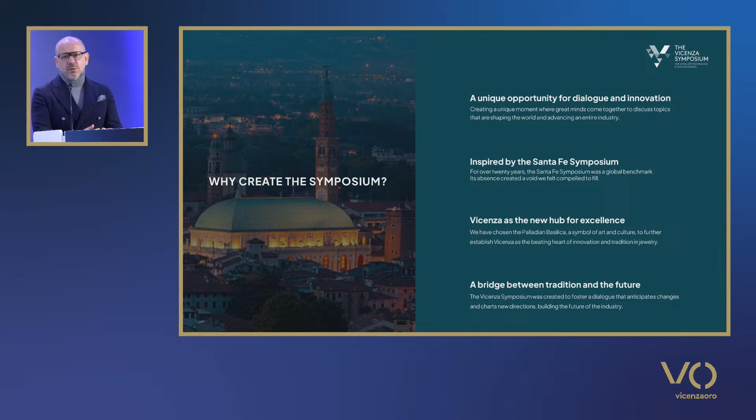Well, of course, we thought, where are we going to hold it? And then one day we thought, well, why not Vicenza? And here we have developed the most appealing part of the whole conference.

The conference will take place from the 2nd to the 4th of September, 3 full days, and it will take place every second year. We will give the opportunity and the time to those who want to share their efforts to present them, and we will give innovation time to take place.

We expect at least 100 paying participants. And I would like to add that we're trying to do anything to have the Basilica filled with participants, because we would rather have too many participants than too few.

We will have 21 speakers with a very high quality level and significant contributions. 7 presentations each day, 45 minutes for each single speech. And now the most beautiful aspect.

Personally, whenever I've attended a symposium, well, they used to take place in hotel ballrooms. Okay, the symposium also works in a ballroom, but think about being in the immense Basilica by Palladio. This is a fair playground for our ambition.

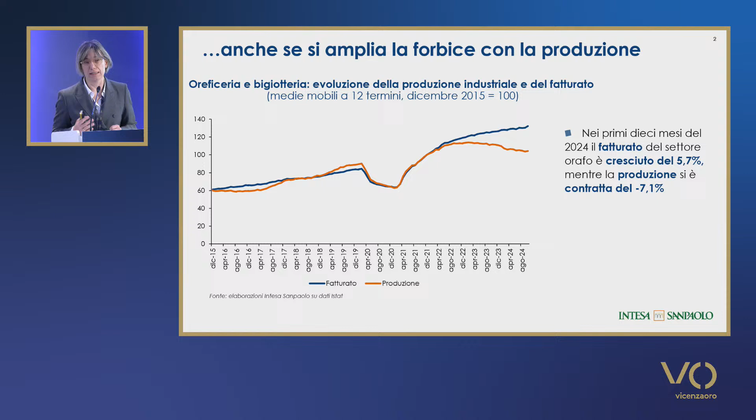Manufacturing quantities, and this again proves the previous data to be true also for gold jewelry. There has been a growth by 5.7 in terms of turnover, but the production has been reduced by over 7%, as confirmed also for the month of November. So what has led to this growth in terms of turnover? Well, competitiveness

certainly on international markets. Indeed, this industry is always able to present and offer its products on foreign markets, with a value growth by 44%. Comparing the gold industry with other elements of the fashion industry proves that this industry can always be different, but we're going to see in greater detail why this growth has been so remarkable.

The industry, in fact, has confirmed its leadership in Europe. Italy is certainly the most important market for the production of jewels, and this is quite self-evident looking at this chart, with the leadership in terms of export, 9.8 billion of jewels exported.

This figure could be even an underestimate, because it would be better to look at the export in Ireland. We know that in Ireland no jewels are manufactured, but we could include Ireland, and even the export by France, certainly are impacted by the connection with the luxury high-end companies that import products from Italy. Over 54% of the export from Europe are coming from Italy.

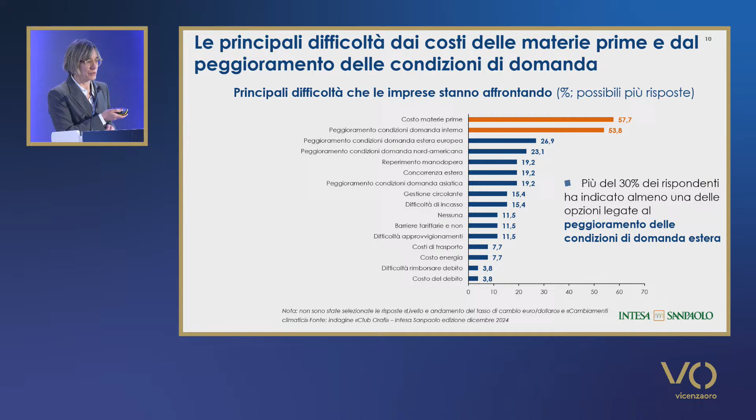What are the difficulties that companies should overcome? Certainly the cost of commodities and raw materials is number one, as well as the fear that domestic demand slows down, along with international demand. 30% of respondents identify this as the main difficulty to tackle at this specific point in time.

Companies are very much impacted also by the results of the US elections. We looked at this data in December, and Trump had just won the elections when we carried out this interview. So we interviewed the business community to see what their expectation was in case of an increase of tariffs. Companies proved to be quite dynamic in finding new customers in different markets should tariffs be imposed in the US.

Pure gold, platinum and silver, like all pure metals, are relatively soft, with low yield points and hardnesses, and this has several drawbacks in the fabrication of 24 karat gold, pure platinum and pure silver jewellery, limiting design possibilities as well as making such jewellery heavier and prone to scratching and wear. This problem has traditionally been overcome by alloying to increase hardness and strength, leading to the use of carat golds, sterling silver, and 950 platinum, and the lower finenesses of platinum and silver in modern jewellery.

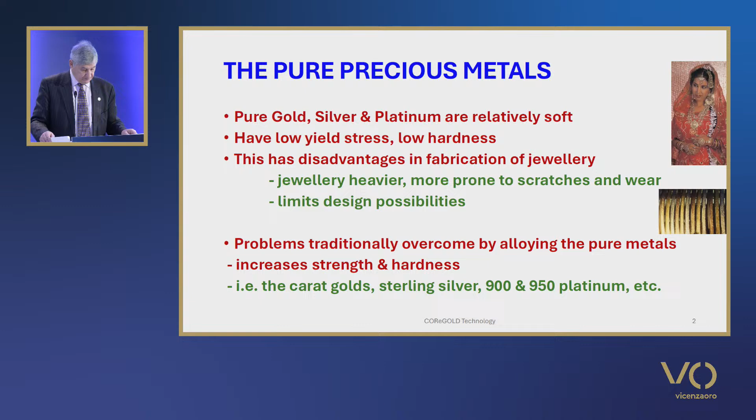However, for gold, especially 24 karat gold of purity greater than 99.0%, is the alloy of choice in the Far East, where it is known as Chuk Kam, meaning pure gold. In the largest market, India and its subcontinent, 22 karat gold jewellery dominates. These two markets account for around 40% of total jewellery fabrication, and the relative softness of both 22 and 24 karat gold is seen as a weakness.

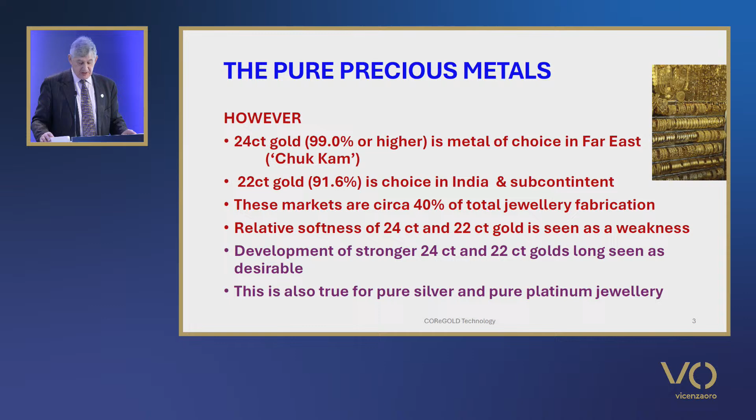The development of stronger 22 and 24 karat golds has long been desired. For gold, the development of 990 gold - that's 99% gold, 1% titanium alloy - in the late 1980s, hallmarkable as 24 karat, overcame many of the deficiencies of 24 karat gold with good strength and hardness. But it has not met with much commercial success for several reasons.

In recent years, however, there have been a number of hardened or improved strength 24 karat gold materials developed with finenesses of 99.5% or higher, some in commercial production, where improved hardness and strength have been achieved by micro-alloying, i.e. the addition of very small amounts, typically 0.3%, of certain metals, and these are attaining some limited penetration of the market.

Microalloyed silver and platinum materials with increased strength and hardness have also been developed and are being commercialised. Until relatively recently, little information was published on such microalloyed precious metals, mainly in patents, and there was little understanding of the metallurgical basis for such materials.

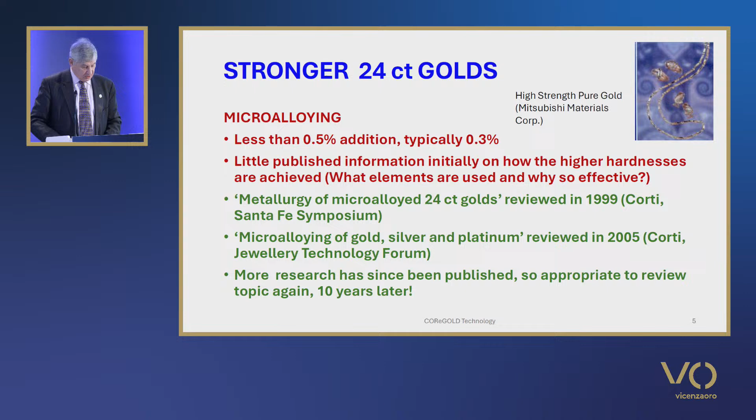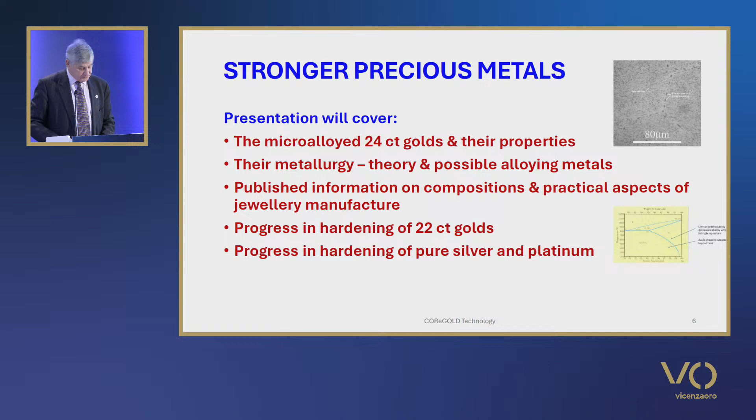Thus, some 10 years later, it is perhaps an appropriate time to update progress and knowledge. This presentation initially focuses on the mechanisms of strengthening metals, then reviews recent developments by conventional alloying of pure precious metals, and then on microalloying of gold, covering the following aspects: the microalloyed golds that have been developed in terms of their properties compared to conventional carat golds; the metallurgy, the theoretical basis for hardening, and possible candidate alloying elements which could form the basis of microalloyed 24 karat golds; and published information on the compositions and practical aspects of jewellery manufacture in actual microalloyed 24 karat golds. Progress in hardening of 22 karat and other high karat golds, as well as platinum and silver, is also discussed. The advantages and disadvantages of such materials for jewellery application are considered.

We look at the mechanisms of strengthening pure metals by alloying, as well as work hardening by deformation. There are essentially three basic mechanisms of strengthening or hardening pure metals through additions of alloying elements: solid solution hardening, dispersion hardening by second phases, and grain refinement.

Solid solution hardening. In hardening by solid solution, alloying additions dissolve in the pure metal, that is, they are incorporated into the crystal lattice of the pure metal, and this results in distortion of the crystal lattice, making dislocation slip more difficult. That means it requires more force to deform the metal.

The degree of hardening depends on the relative difference in atom size of the pure metal and the alloying metal, as well as the amount that you add. Thus, in carat golds, it is well known that copper is more effective than silver in hardening gold, as its atom is about 13% smaller compared to silver,

which is only slightly larger than the gold atom. In dispersion hardening by second phases, when a second phase is dispersed in the metal, it will cause some hardening.

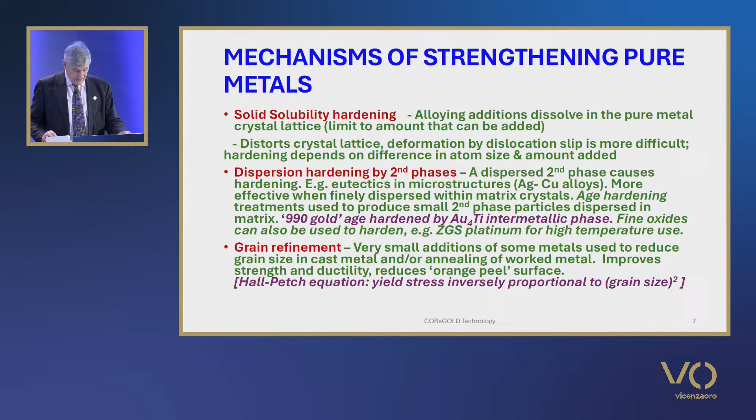If we look at conventional alloying, here we're talking of adding alloying metals in amounts of at least 0.5% or more. The addition of 1% titanium to pure gold to produce 990 gold has been referred to previously. Other significant improvements to 24 and 22 karat golds have been described using conventional alloying approaches.

Dutoit and co-workers at Mintek in South Africa showed that a 995 fine 24 karat gold containing 0.3% antimony and 0.2% cobalt can be age hardened to a hardness of 131-142 Vickers, depending on aging temperature, as shown in the table. And we can argue whether this is conventional or micro-alloying. My feeling is it's probably the latter.

Fischer-Bühner, when he was at FEM, has demonstrated the use of circa 2% to 2.5% cobalt additions to effect significant strengthening of 22 karat gold with aged hardnesses of 200 to 260 Vickers, although this involved a relatively high solution annealing temperature of 900 degrees Celsius.

And he also showed that a combination of cobalt and antimony, in total 1%, resulted in a hardness of circa 150 Vickers after aging, but using a lower solution temperature of 700 degrees.

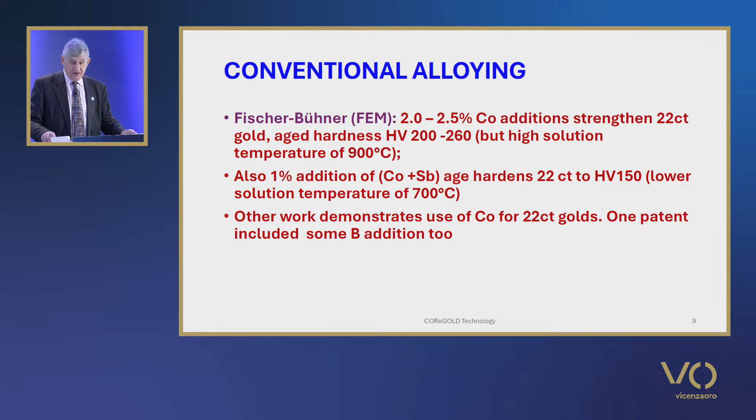We now move to microalloying of gold. I'm going to repeat a lot of what I've said in my earlier review in 2005. But before I start, I just want to say something about the density effect when you're alloying.

We must distinguish between the difference between the atom weight and the atom volume in an alloy. The higher atomic numbered metals are heavier and denser. Gold is a heavy metal with a density of 19.32, where silver has a density of only 10.5 and copper a density of only 8.93.

Thus, in describing alloy compositions, we must differentiate compositions given in terms of weight percent and atomic percent. Weight percent: the relative weights of alloying metals present. Atomic percent: how many atoms there are of each metal in the alloy. This difference is illustrated with gold-copper alloys.

An alloy of 50 atomic percent gold atoms and 50 atomic percent copper atoms, that is 1 gold atom to 1 copper atom, has a weight composition of about 75% gold, 25% copper. And that reflects the difference in the weight of the gold and copper atoms.

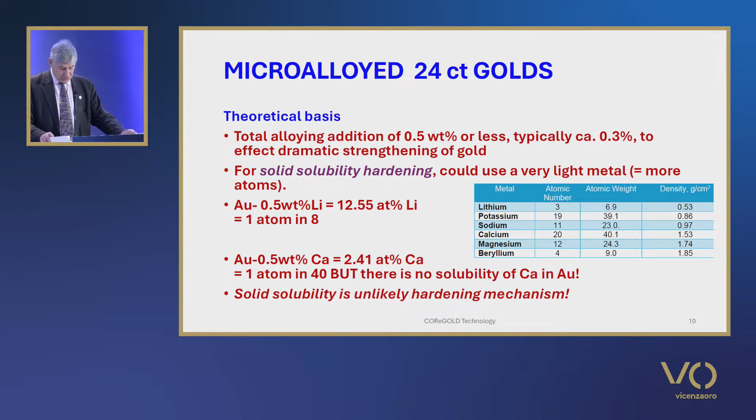Reference to the phase diagram shows that there's virtually no solid solution of calcium in gold, and that there is a eutectic comprising two phases: gold and an intermetallic compound, gold-5-calcium, which has a high gold content. If this phase is finely dispersed in the microstructure, then we have the basis of a possible alloy system that could provide improved properties through dispersion hardening.

We find similar features to the gold-calcium system in the phase diagrams for the gold-potassium system, but less strongly, and in the gold-beryllium, gold-magnesium and gold-sodium phase diagrams, suggesting that they are less favourable for a microalloying approach.

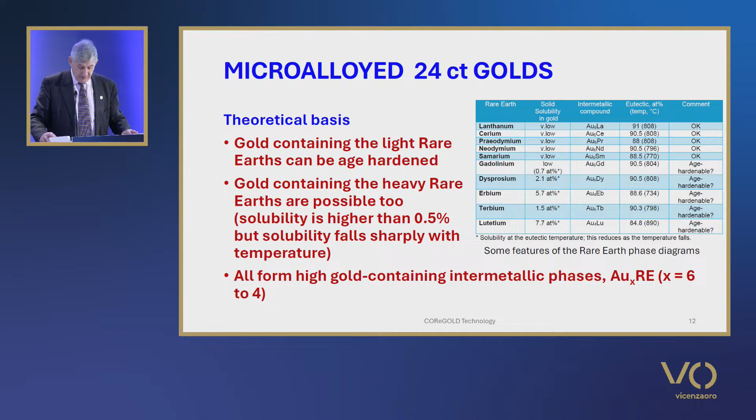In the development of 990 gold, Gafner describes work done by the Degussa company in Germany on other candidate alloy systems, which included the heavy rare earths. The basis for selection was the possibility of second phase precipitation, as the alloy containing a 1% alloying addition in solution was cooled from 800 to 400 degrees Celsius.

From this, a table of probable hardening effectiveness was constructed, and I haven't put it on the slide, but it is in the written paper, which you can get when it's loaded up on the website. The fraction of hardening phase was taken as an indication of the hardening effectiveness. The reason for developing the 990 gold titanium alloy is obvious from this table, as it has the highest fraction. The promise of the rare earths and zirconium was also noted.

However, in that work, a 1% alloying addition was being evaluated. If we consider only a 0.5 weight percent addition of rare earth, then from the solubility data at 400 degrees Celsius, we cannot expect much hardening phase to precipitate on annealing solutionized material at 400. Fortunately for us, Giusti carried out some tests on gold rare earth alloys at alloying levels of 1 weight percent and lower. Cast alloys were annealed at 800 for 1 hour.

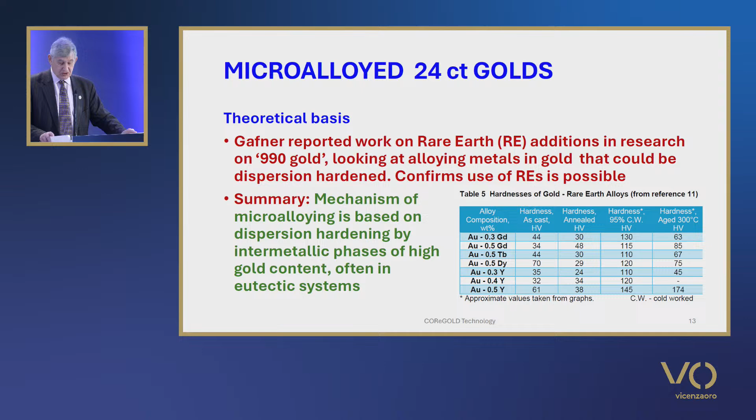So let's move on and just recap on improved strength 24-karat golds. As I reported in 2005, a number of improved strength 24-karat golds have been developed, some commercially available, and jewellery produced in these materials are in the marketplace, particularly in Japan. All have virtually the same melting point, colour and density as normal pure gold. These are listed on the table on the slide.

It is evident from this table that while annealed hardness is usefully higher than for normal commercial pure gold, cold working results in significant hardness increases, and that some materials can be further hardened by low temperature aging heat treatments. Perhaps not surprisingly, the highest hardnesses are achieved in the lower purity golds of about 99.5 to 99.7 fineness. Most can be cast, but the best hardness values are achieved in the wrought condition, often coupled with aging heat treatments.

From a practical standpoint, as far as published information tells us, these materials cannot simply be remelted and recycled without loss of strength, as the hardening microalloying additions lose their effect on remelting. As we shall see later, this is due to the oxidation of the microalloying metals on melting.

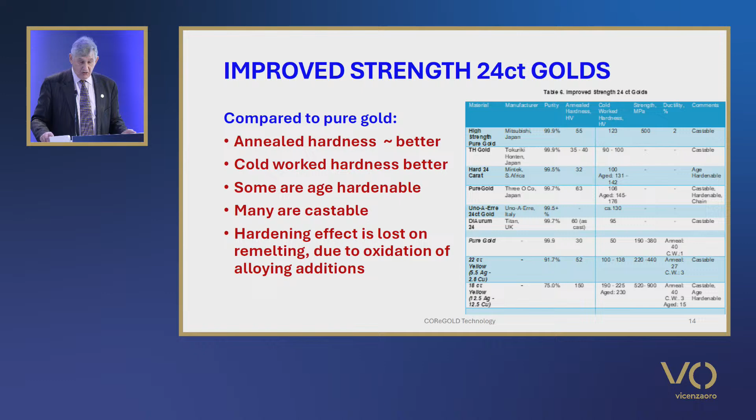The superior strength of these materials has a beneficial effect in manufacturing jewellery in that certain processes can be done that are difficult with normal 24-karat gold. For example, findings such as lobster claws and some difficult chain designs become feasible. It also allows lighter weight 24-karat gold jewellery to be made with obvious economic benefit.

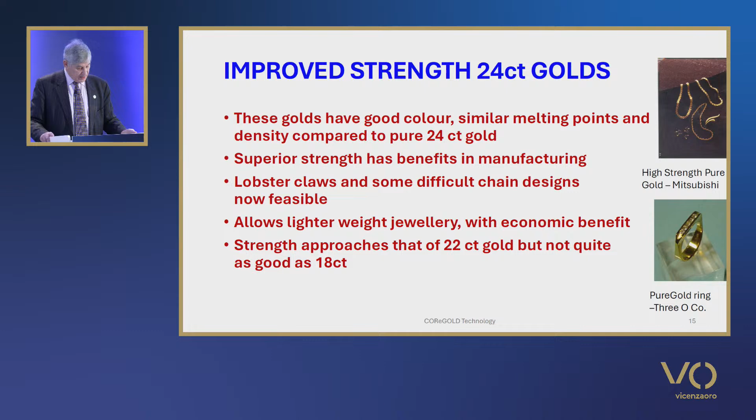When compared to standard yellow carat golds, it can be seen that the improved strength microalloyed 24-karat golds approach the hardness of 22-karat gold in both annealed and cold work conditions, but are still some way behind those of 18-karat gold.

So what are the compositions of these microalloyed golds? The patent literature indicates that the Mitsubishi Materials high-strength pure gold material comprises gold of at least 99.9% purity and 200 to 2,000 parts per million calcium and or beryllium, germanium or boron, whilst a further patent from Mitsubishi indicates just 500 to 2,000 parts per million calcium plus 1 to 50 parts per million of carbon. Calcium appears to be the main hardening addition.

The Three O company patent indicates that the pure gold material contains 99.7% gold plus 50 or more parts per million of gadolinium and optionally 100 to 3,000 parts per million of calcium, aluminium or silicon. In a patent from Tanaka KK in Japan, an alloy for precision casting is claimed containing small amounts of hafnium and the rare earths.

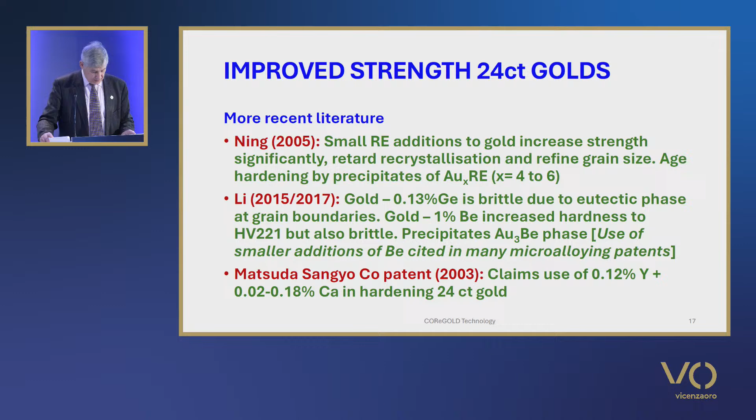The 2003 patent by Matsuda Sangyo claims the use of 0.12% yttrium and 0.02 to 0.18% calcium for hardening of 24-karat gold. Another patent by the University of Tokyo claims a gold-X rare earth alloy, where X is selected from aluminium, gallium, indium, germanium, silicon and tin, and the rare earth is a rare earth element.

An earlier 2004 patent by Tokuriki Honten claims a harder 24-karat gold containing at least 99.5% gold and 5 to 1,000 parts per million of phosphorus, plus 10 to 1,000 parts per million of one of a group including antimony, copper, zinc, iron, cobalt, nickel, gold, silver and gallium.

A Chinese patent claims a stronger 99.9% gold microalloy containing calcium and a rare earth element plus a grain refiner, while a 2000 patent by Ogasa claims an age-hardenable 24-karat, 99.98% gold microalloy containing gadolinium that reaches a hardness of about 150 Vickers after aging.

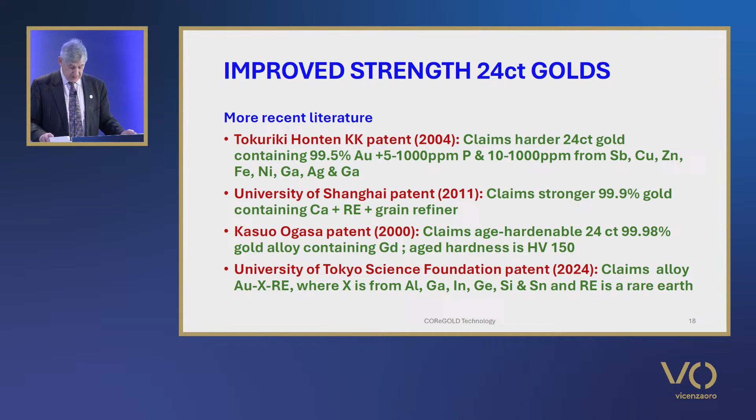So I think in summary from all of that, we can say that the more recent literature confirms the use of calcium and rare earth additions as preferred microalloying metals, but other additions are also possible. It confirms age hardening as the major hardening mechanism, with the precipitation of high gold content intermetallic phases within the grains.

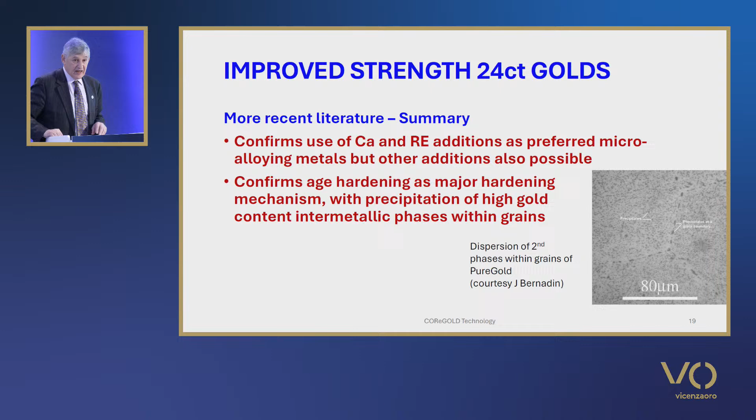And in the picture, it's a microstructure of the Three O company's PureGold, and we can see there are some precipitates on grain boundaries, but the whole of the internal grains has got a very fine distribution of the intermetallic hardening phase.

I'm now going to move on and talk about improved strength 22-karat gold alloys. As noted in my presentation last year here at JTF on the benefit of titanium alloying additions to precious metals, 22-karat golds also tend to be soft due to the limited amount of alloying element that can be added, which is typically silver and copper.

Fischer-Bühner developed 22-karat gold alloys containing cobalt or a mixture of cobalt and antimony, as I mentioned earlier, to harden 22-karat golds by conventional alloying. And these have increased hardness by age-hardening treatments, as discussed earlier.

Similar work has been reported by Mintek in South Africa. In their 2000 paper, they reported on a new hard 22-karat gold alloy, but gave no details of its composition. It has a colour similar to conventional 22-karat gold, but can attain a peak hardness of 274 Vickers in the cold rolled and aged condition.

However, in a later paper in 2003, they describe work on both 99.5% gold and 22-karat gold, that's a gold, copper, silver alloy, in which they study the effects of alloying metals cobalt, germanium, antimony, zirconium and vanadium in hardening them. There they report a maximum hardness of 274 Vickers after cold rolling and aging for a

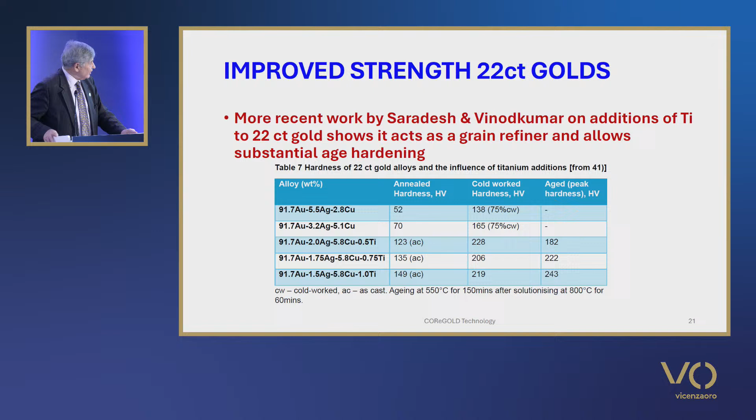And here we can see some results that I'm just going to discuss in the next slide. And I showed this last year, so I'm going to move on quickly and just talk about them. So 22-karat gold alloys, I spoke about last year, demonstrated that titanium alloy additions act as a grain refiner and allow substantial age hardening. And we saw in that table some results.

The commercial use of a 22-karat gold alloy strengthened by titanium, based on this work by the Titan company in India, has allowed jewellery products to be marketed that show a 30% weight reduction compared to conventional 22-karat gold alloys.

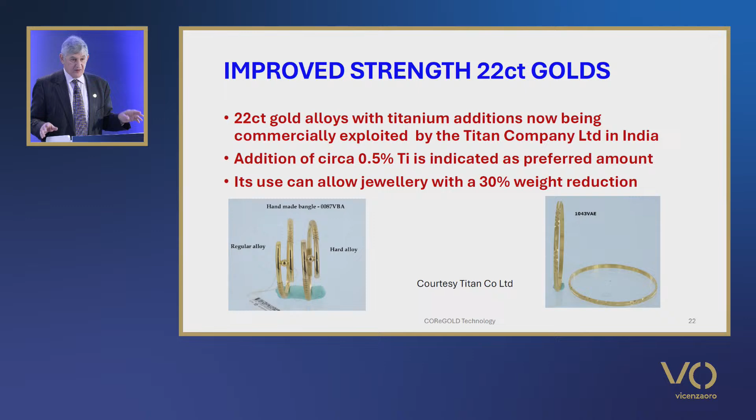The figure on the bottom left of the slide shows a hollow bangle in their new alloy. That on the right shows a solid bangle. And my understanding is it's about 0.5 weight percent titanium is the alloying addition.

And let's just talk about some of the practical aspects of making jewellery in these microalloyed golds. In summary, these are that you can investment cast and fabricate by conventional technologies. You can make some products that are difficult with normal 24-karat gold, as I said earlier, some chain designs, springs, screws, catches, and other findings.

You can make lightweight, strong chains with good wear properties. Melting generally needs to be done in an inert atmosphere to prevent oxidation of the microalloying metals. Therefore, they cannot be made easily in a small workshop situation by conventional melting in air.

As with normal 24-karat gold, soldering must be consistent with local national laws, and in some countries, use of a lower 22-karat solders is allowed, although there may be limits on the amount of solder used.

However, another factor is the temperature of soldering, which can lead to a loss of work and age hardening in the vicinity of the soldered joint. Laser welding may offer a better solution there.

There are also very low melting point 22-karat gold solders, I might like to remind you, and one solder has a melting point of only 361 degrees Celsius. Polishing should be easier than conventional 24-karat golds, as they are harder. And Bernardin, in his paper at the Santa Fe Symposium, noted that castings require procedures similar to those for platinum.

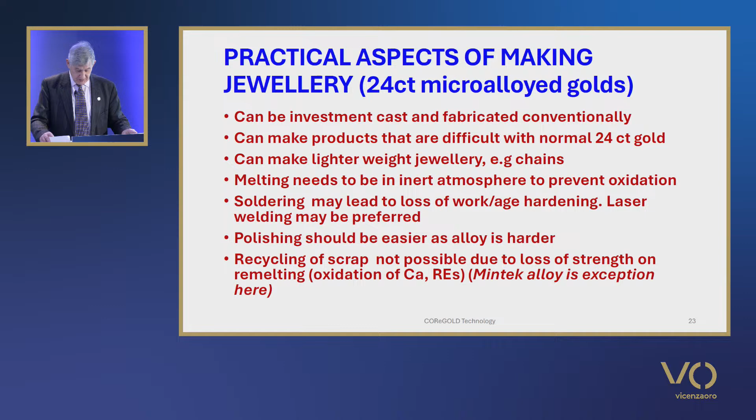Right, let's just move on quickly to the microalloying of silver. In principle, it will be evident that the same approach for microalloyed gold could be applied to silver. The developer of pure gold also developed a material pure silver, which is a 99.3% silver microalloyed material, and this is being marketed in the USA.

It is claimed to be easy to work, as it does not require annealing, is very tarnish resistant, casts well and is harder than sterling silver. The patent covers microalloyed gold, silver, palladium and platinum materials.

In the case of silver, an alloy of at least 80% silver is claimed, containing the rare earth gadolinium in the range of 50 to 15,000 parts per million, with optional further additions of alkaline earth metals, silicon, aluminium and boron in the range of 50 to 15,000 parts per million in total, with hardness values of 130 Vickers or higher and a Young's modulus of not less than 7,000 kilograms per square millimetre.

A further embodiment of the patent claims an alloy of at least 99.45% silver with 50 to 5,000 parts per million of gadolinium, plus further optional additions of the same metals. Hardness values of at least 120 Vickers and a Young's modulus of 7,000 kilograms per millimetre squared are claimed, with hardness rising to at least 140 with 50% cold work.

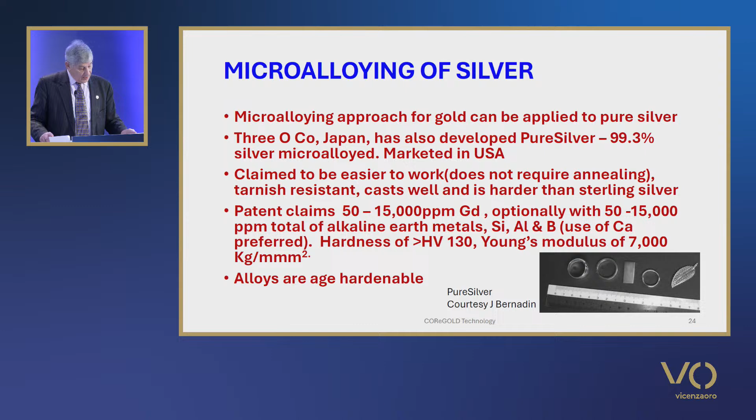And lastly, let's talk about microalloying of platinum. Microalloying of platinum should be possible. Of course, oxide dispersion strengthened platinum, as I mentioned earlier, for industrial applications has been on the market for many years.

In a patent from Japan, a hard, high-purity platinum alloy containing 10 to 100 parts per million of cerium is claimed that has a good hardness, luster and tarnish resistance, suitable for jewellery manufacture, and is at least 99% purity. Vacuum or inert gas is required during melting to prevent loss of cerium by oxidation.

A platinum cerium phase diagram shows characteristics similar to that of the gold cerium system. For cerium contents of 0.03 to 0.3%, hardness values of 60 to 102 were obtained compared to 40 Vickers for pure platinum, and hardnesses of 120 to 136 for 950 fineness platinum alloys.

A commercial alloy UHP platinum from Japan appears to be a microalloyed platinum at 999.5 fineness, but little information is available.

The Ogasa patent, that I mentioned earlier, also includes platinum materials, and this claims platinum alloys of at least 85% platinum containing gadolinium and the other optional elements listed above for silver, preferably calcium, in the range 50 to 15,000 parts per million in total.

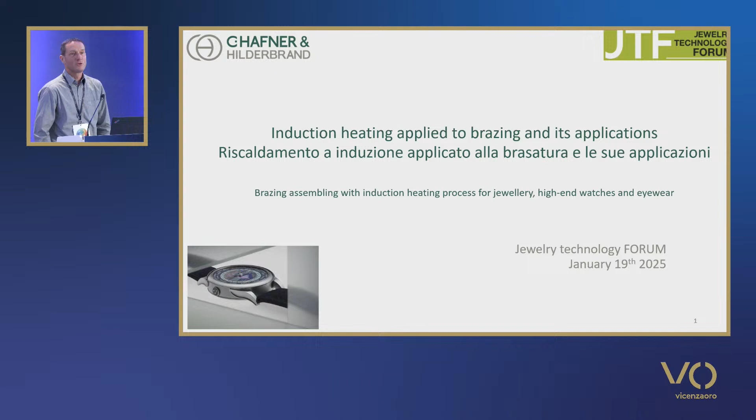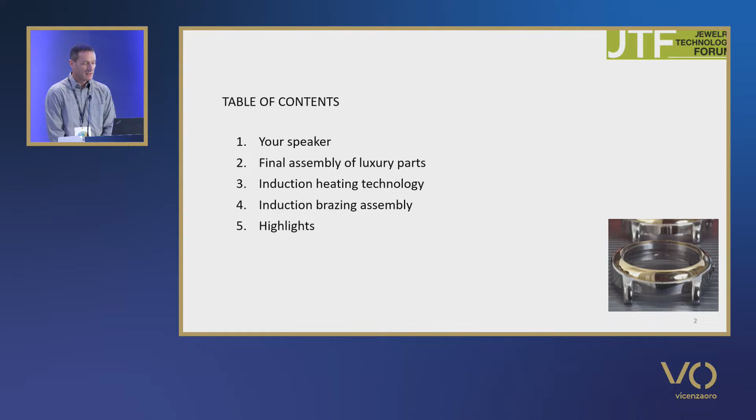My presentation is divided into 5 parts. First I introduce myself. After, I show you the requirement of final assembly for luxury parts. And after, I present you the induction effect, and finally merge the assembly for luxury parts and induction effect. At the end, you have to remember the highlights.

So myself, first, I just apologize for my lovely French accent. Shortly, I have about 30 years of experience in welding and brazing, including 20 years in the luxury sector.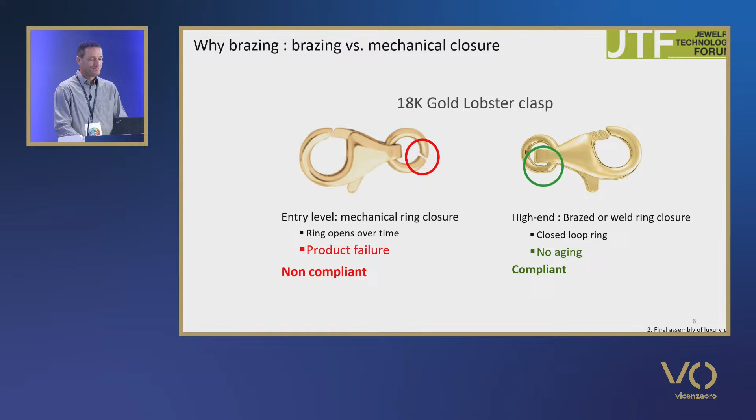Another way, two ways to create a completely metallic link, is brazing and welding. For welding, only the laser is compliant with luxury requirements due to small pieces and very high precision.

For laser welding, the laser ray melts locally the 2 different parts and creates a definitive link. For brazing, the key point is to insert a low melting alloy, not too low, and during heating the low melting alloy creates a definitive link for assembling the 2 components.

I just insist on a wording point. What we have to say is, what is it, solder paste or brazing paste? According to the standard, the term soldering, also called soft brazing, must be used for assembling with filler metal at a temperature under 450 degrees.

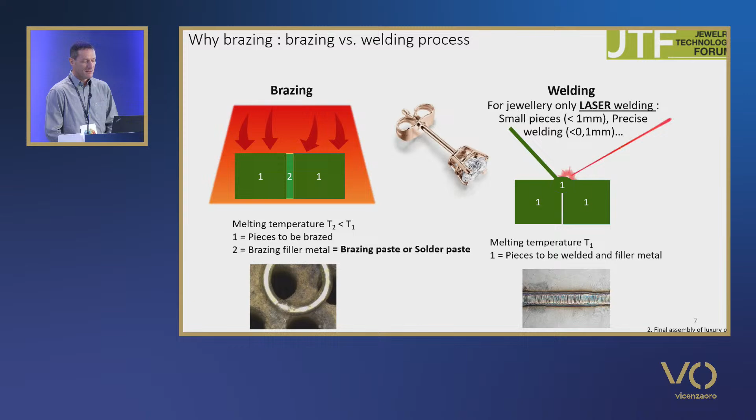For instance, when using tin-based filler metal for assembling electronic components, it is called soldering, and so the filler metal is called solder paste. The term brazing, also called hard brazing, must be used when the assembly is carried out at a temperature above 450 degrees. It is always the case for luxury goods. Subsequently, only the term brazing paste will be used.

Welding is very interesting for very high mechanical strengths, and it is possible to use a filler metal exactly with the same composition as the base metal.

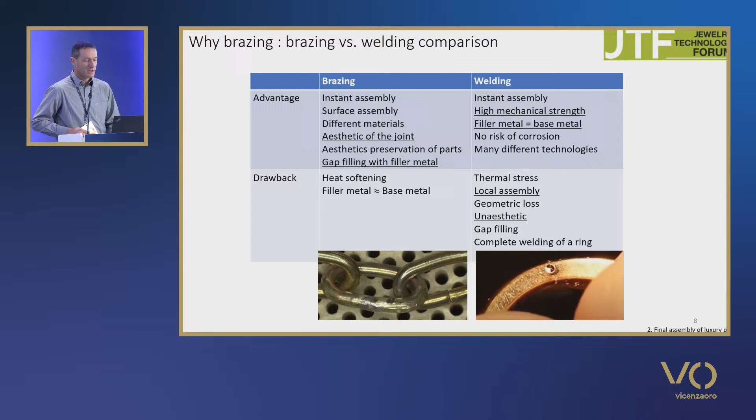For brazing, the key point is the aesthetic of the joint. Welding involves very local heating, and so an affected zone. Welding is very interesting for repairing. Brazing, with very high quality and the possibility to braze the finished part, is perfect for first production.

Brazing overall process: there are some subsequent operations—machining, deburring, washing—and you have to pre-assemble the components and dose the filler metal. The heating process of brazing can be performed by a furnace, torch, or induction. And the next steps are finishing, grinding, something like that.

The brazing filler metal requirements. The key points for filler metal is melting point, which should be as high as possible, but not too close to the component's melting point.

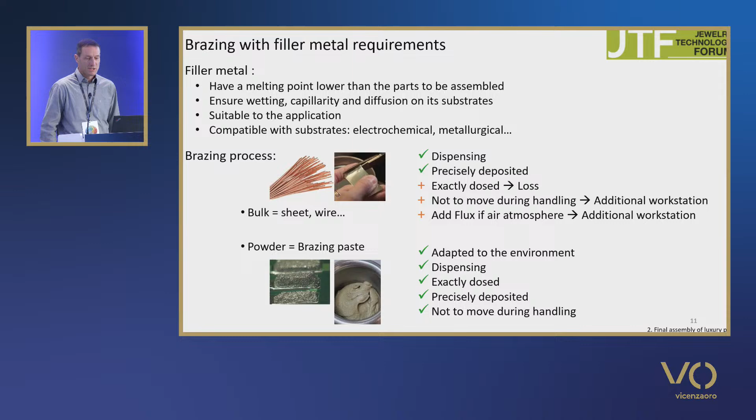Suitable to the application means the right metal, first the right metal fineness for 18 karat gold, the right color or the closest color possible, and the mechanical requirement for luxury goods.

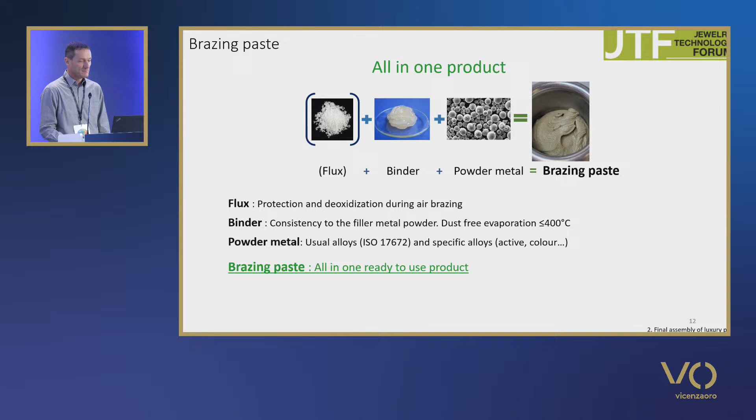What is brazing paste? A brazing paste is a mix of a flux, a binder, and a powder metal. The flux has a first shielding effect on the components, and when it completely melts, it creates a deoxidation in order to protect the filler metal. The binder allows the powder to be packaged and dispensed. So brazing paste is an all-in-one, ready-to-use product.

Some key points about the brazing paste. First, I insist on the color. On the right, you can see the CIELAB diagram that presents the three base colors in a board. As you can see, 4N and 5N, pink and red golds, are on the right, and traditional alloy, used in bulk way, is quite far from the real color.

A key point with brazing paste is that you can create a very fine alloy that is very close to the regular color of 4N and 5N.

For the Hilderbrand binder, it contains no water, so it's not drying. The brazing paste is compatible with main heating processes, such as induction or torch. And brazing paste is very easy to dispense.

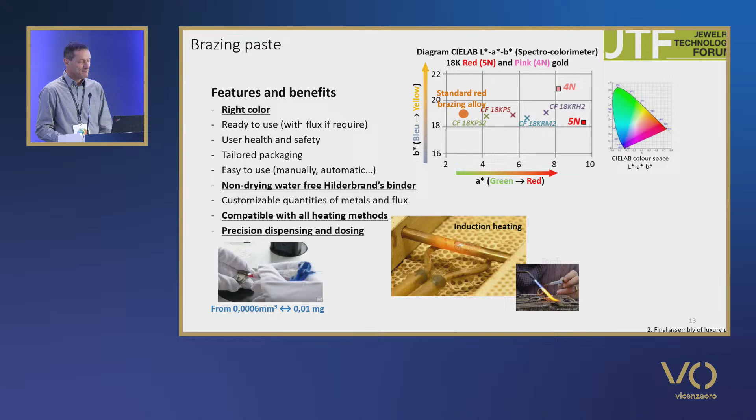Induction heating: Michael Faraday is credited with discovering the induction effect, and the mathematician James Clerk Maxwell put the effect into equations. We have just to remember that Maxwell's equations link magnetic field with electric field and electromagnetic force, and it can lead to the electromotive force.

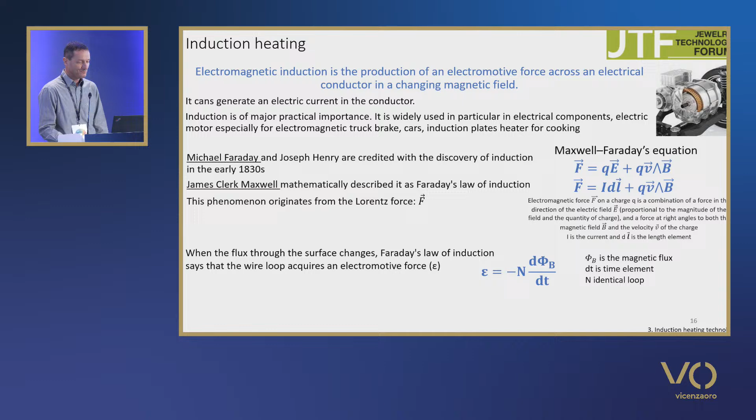With the equations, you can calculate the power of the induction effect and the thermal efficiency. But in everyday life, what does it mean?

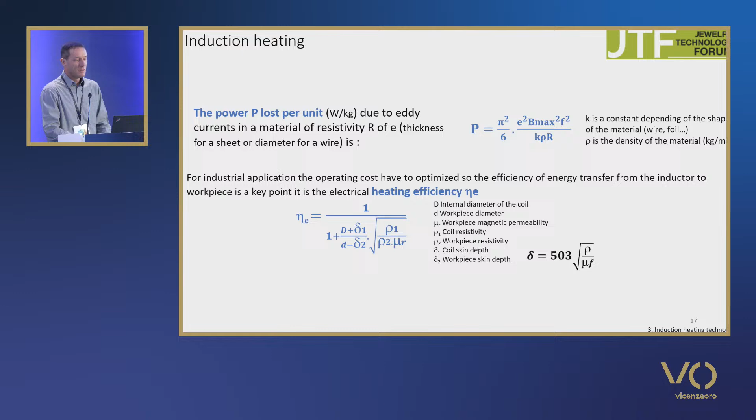Many people use induction for heating their morning coffee using an Italian coffee maker. The well-known Italian chef Massimo Bottura uses an induction hob. And the induction effect is widely used, as shown in induction hobs for cooking.

What is really the induction effect? When you move a magnet near a coil, it creates a current. And by reciprocity, when a current flows in a coil, it creates a magnetic field.

If instead of a continuous current you have an alternating current, it creates electric and magnetic fields. And by reciprocity, electric and magnetic fields in metallic materials create alternating current based on eddy currents. The heating from the induction effect is done by the Joule effect on the eddy current.

As shown on the induction hob, the induction coil creates a magnetic field. The cookware is based on iron materials, sensitive to the induction field, so an eddy current is created, and the heating effect appears. Thanks to this eddy current, it is possible to heat a conductive piece without contact.

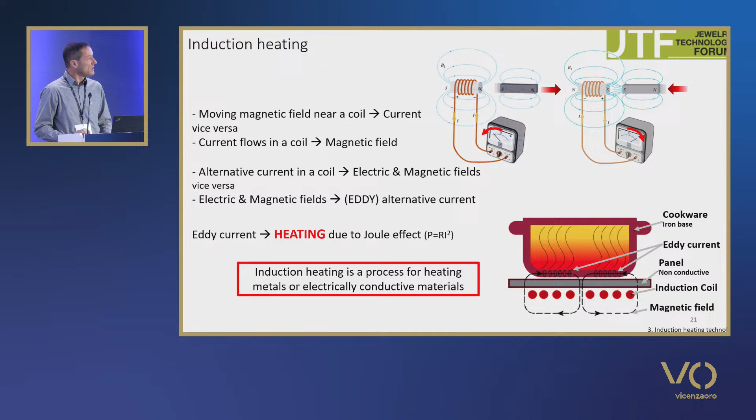Second, the greater the applied current, the greater the eddy current, resulting in a greater temperature inside the product.

The induction power only works on conductive materials. So, for instance, egg cooking only heats the metallic part.

Due to the fact that electric and magnetic fields do not penetrate conductive materials, there is a skin effect, and the induction heating power is linked to the frequency.

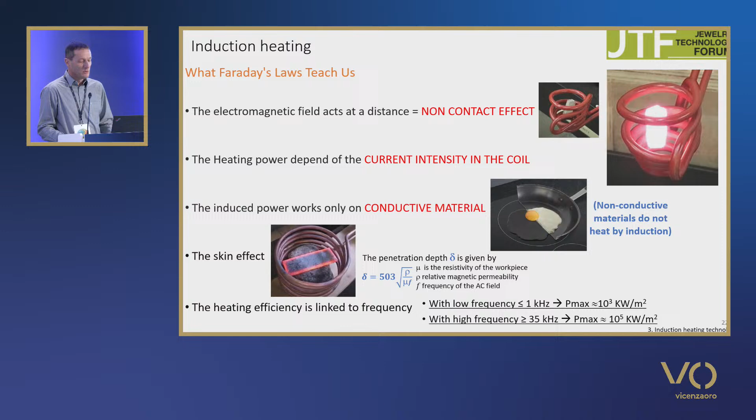In reality, induction tools are quite easy to make. You can do it on your own, and the starting point is a single wire loop. In technical terms, you multiply the effect by n.

As I explained, the induction effect acts at a distance, but it decreases very quickly with distance. So the coil has to be as close as possible to the heating zone.

The induction effect depends on the materials. As shown, stainless steel, titanium, and graphite are very good candidates for induction heating. The poor resistivity of gold and silver is a problem, but they have very high density, so it is still possible to heat gold and silver metal.

In this table, I show you PTFE, Teflon, quartz, and alumina. They are widely used in holding and enclosure systems for induction. Due to their very high electrical resistivity, they are not affected by the induction effect.

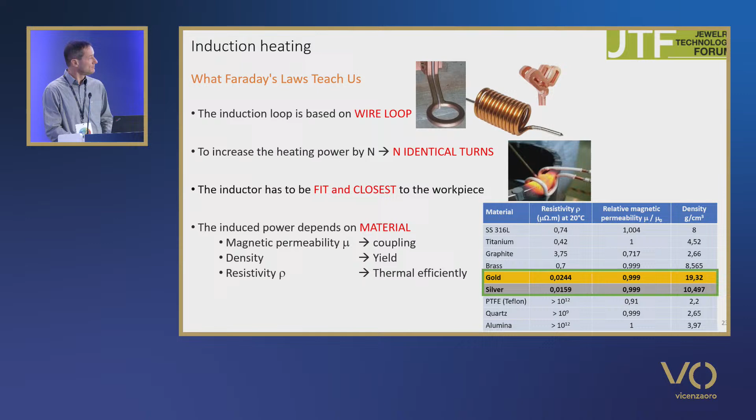Induction is a very local heating. It is quite easy to automate, and it's a physical process control.

So the first tool for induction can be do-it-yourself, easy with the hand. This is a very reproducible physical process, and it's a safe process. No flame, no gas. A brazing paste is an all-in-one, ready-to-use product that is very easy to dispense and dose.

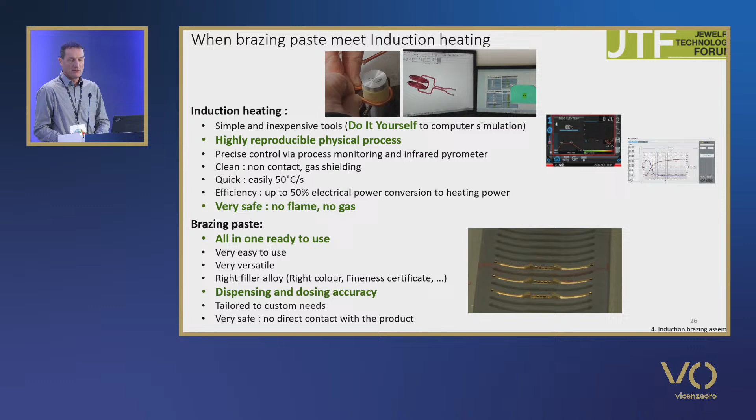So the basis of the induction setup is a power generator, an induction coil, and a ceramic jig, and if you need, you can add shielding gas.

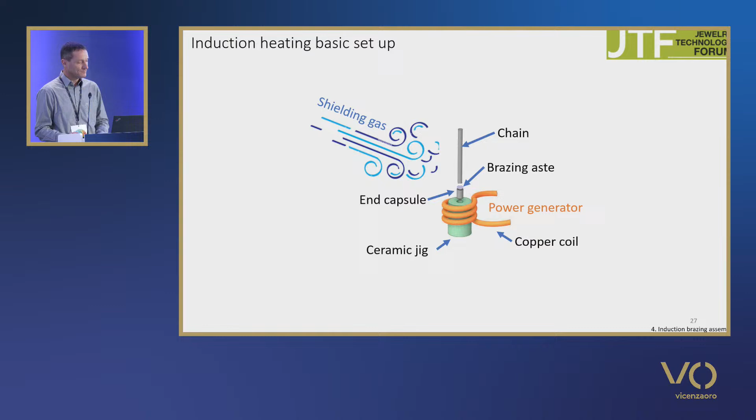With the equipment, there is an AC power supply, alternative current supply, and a transformer, that's the box, the gray box. We add a pyrometer in order to follow the temperature, and you can see the workpiece at about 800 degrees.

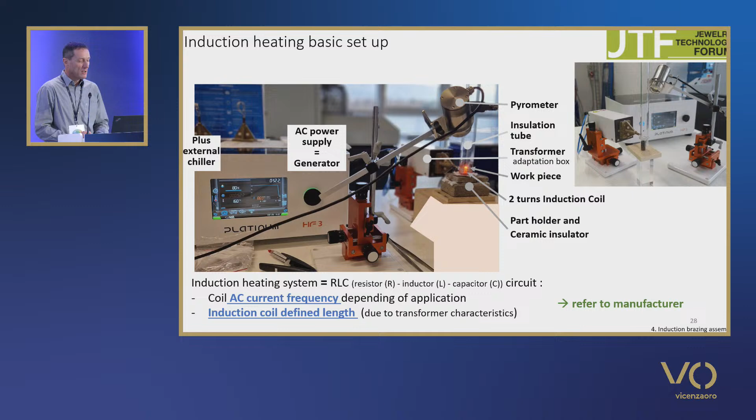There are some key points to refer to the manufacturer about: the AC alternative current frequency and the induction coil length.

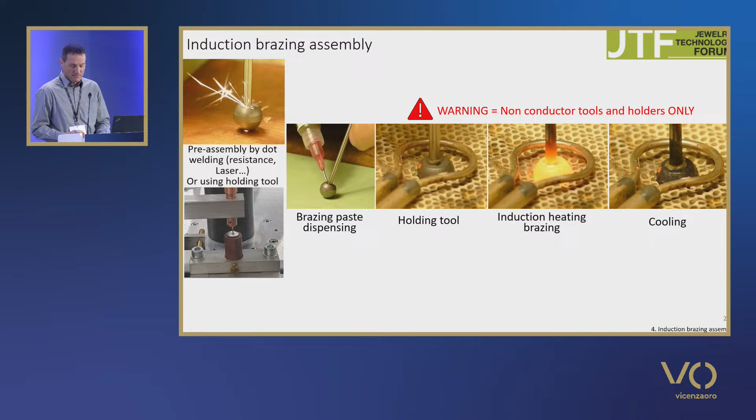There are two ways of induction: direct induction heating, where you put the components closest to the induction coil, or indirect heating, where mainly you use a graphite susceptor.

In a production line, the basic setup starts from a laboratory setup. You can fully manage the equipment with a semi-automatic process, mainly based on rotary stand, and sometimes a full automatic process with belt conveyor.

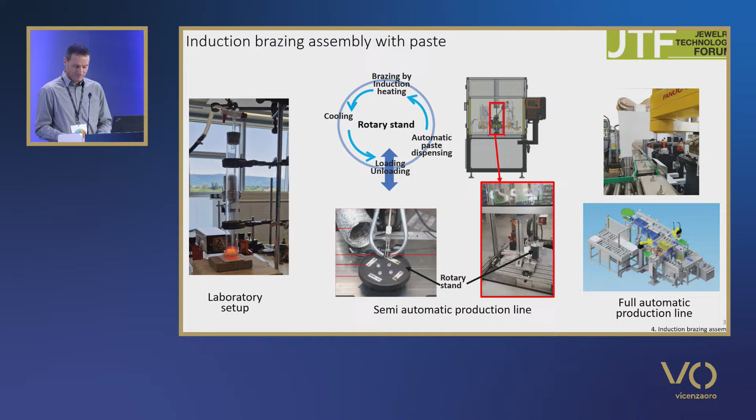Some examples of high-end luxury: many bracelet clasps are brazed using induction heating to achieve only local heating. The well-known lobster clasps,

sometimes there is a spring inside, which is very sensitive to the temperature. So to avoid softening, induction heating is very interesting.

In high-end eyewear with full metallic frames, there are pieces that are widely brazed using induction heating.

In a watch clasp, the pin can be welded with induction heating to avoid heat-treating the clasp, and some high-end watchmakers insert gold parts into full stainless steel bracelets.

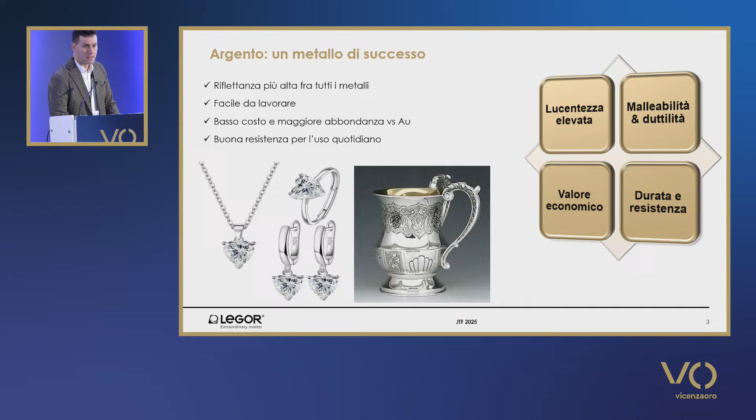Silver has long been used for the production of precious jewels, and this is due above all to the fact that silver is the metal with the highest brightness. It is a metal which is easy to use, has long duration resistance, and although being a precious metal has a relatively lower cost compared to gold or platinum, due also to its abundance in nature and lower mining difficulty, above all compared to gold.

So although being a precious metal, silver is subject to some reactions which can change its aesthetic characteristics. This is called tarnish, and it is a spontaneous reaction between a metal and a non-metal, oxygen or sulfur. In the case of silver, the tarnish reaction is described by a chemical equation where silver reacts with sulfur, giving rise to silver sulfide, which is the tarnishing.

We should specify that this phenomenon is a very complex one because it involves a whole series of reactions which take place simultaneously, and the identification of sulfur composites is not enough because there are various compounds which intervene in this reaction.

Tarnish is a surface reaction. It involves only the first layers of a silver surface, and according to the thickness, there are various colors from yellow to black, which is the real color of silver sulfide.

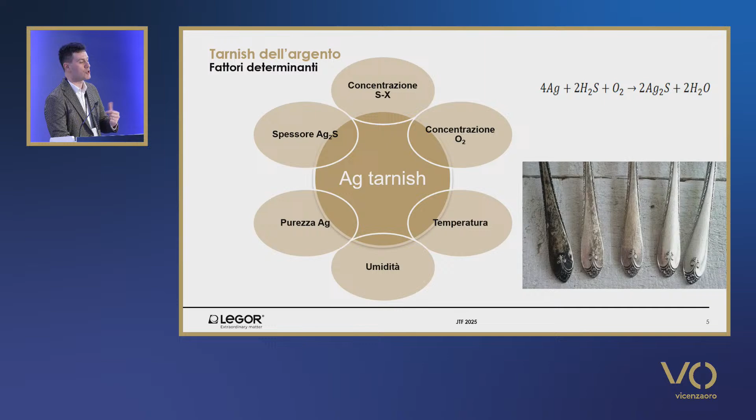The thickness is itself a barrier, and as a consequence, the greater the thickness of sulfur, the slower the reaction. Indeed, the tarnish reaction is a self-limiting phenomenon which involves a low layer of the surface, and it is possible to remove the tarnish layer, which will not attack the whole bulk of silver as can happen in iron. As a consequence, once you have removed the layer, the surface of silver will show its proper chemical and physical characteristics.

But of course, as the silver layer is exposed to atmosphere, it will be subjected to tarnishing again.

There are various techniques. You can use abrasive systems, and the notion is that of mechanically removing the tarnish layer. Of course a certain portion of silver will also be removed, a very small quantity, but we have to underline that.

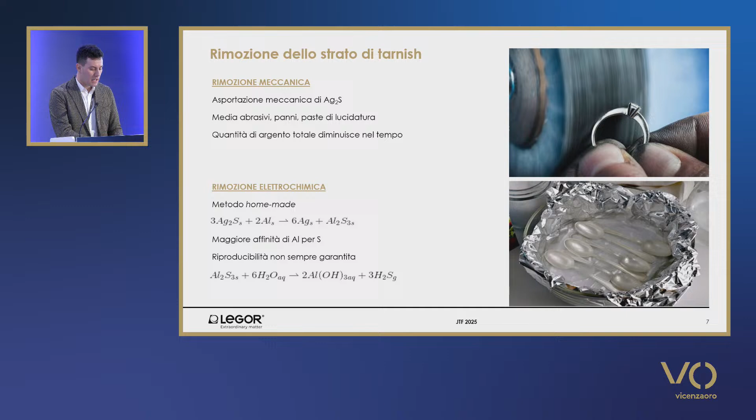There are also other systems, chemical and electrochemical systems. Here, for example, we have a homemade system based on electrochemistry where aluminium is involved. What is suggested in many sites and meetings is that of plunging the silver objects in contact with aluminium paper, thus exploiting the chemical reaction. Well, it's a process which has not a high level of reproducibility because there are a series of actions which can make this process non-effective or even allow for the new deposition of this problem.

Then there are chlorine, peroxide solutions. These are very aggressive products, they can attack the underlying surface. You can also use common detergents you can find in all shops, and these are based on the presence of some mineral salts which have a modest abrasive function, and sulfur is bound by some chelating agents, and aggressive molecules are dispersed.

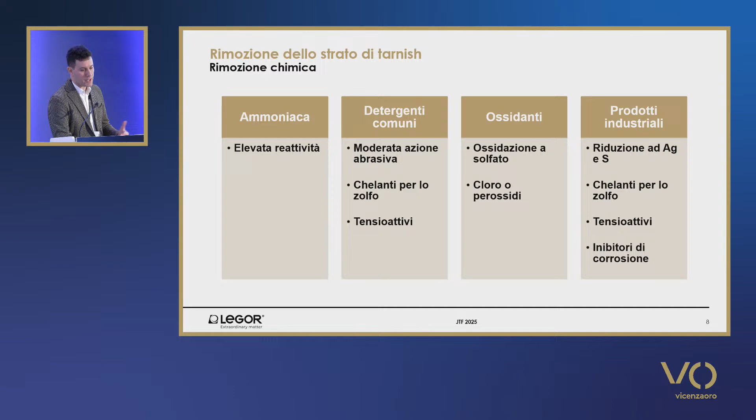Then there are industrial products which use reducing agents which reduce metals. There are chelating agents which bind sulfur, and then corrosion inhibitors which avoid the re-aggression of silver for a long period of time.

As a consequence, well, we have said that tarnish is a spontaneous reaction of silver, so even if you remove it, the surface will still be subject to tarnishing. So what you have to do is to slow down or avoid this type of reaction. It's impossible to stop this process.

Our approach is that of preserving the object with a certain care, avoiding the exposure of these objects to pollution or atmosphere, and then using some anti-tarnish solutions. There are various products, various technologies, all based on the same principle, that of creating a barrier in order to avoid the contact between the surface of silver and tarnish agents.

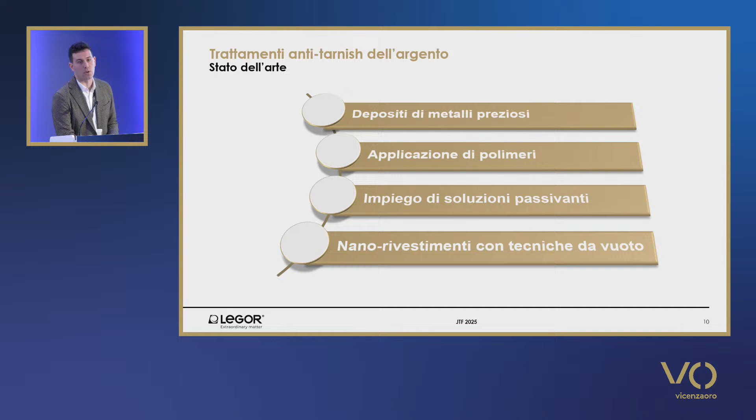Rhodium, for example, has a high resistance to tarnish with high chemical inertia, and it is a precious metal, so it increases the final value of the object. The problem is that the thickness applied is lower than 0.2 micron, so the resistance is guaranteed, but only for a short period of time, because the thickness will tend to be removed, and the surface of silver will be again subjected to tarnishing.

And then rhodium is a white metal deposit, but it is less so as compared to silver. So if we had to express the white color with these CIELAB coordinates, well, rhodium has an L equal to 90.

So we have a certain level of resistance, and then the final cost increases, and it is subject to the oscillations of rhodium costs. Well, the application of organic polymers makes it possible to have a good defense, because there is a high thickness beyond 5 micron.

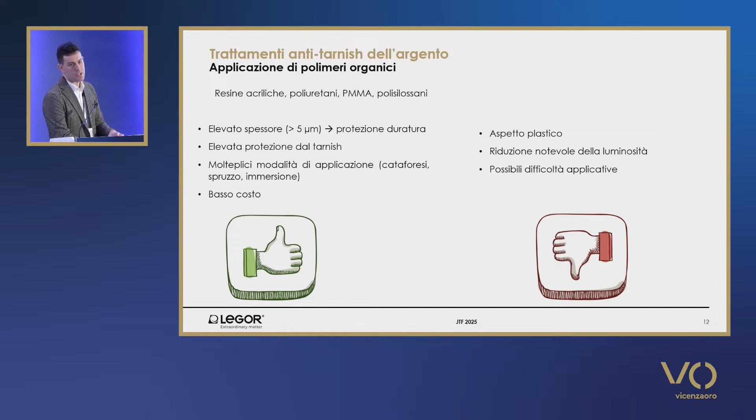These are more complex processes as compared to rhodium. There are some difficulties in the application, and you have to have higher qualified staff.

Now, the most used systems are so-called passivating solutions. In the past, Cr(VI) solutions were used with a high resistance to tarnishing, but they are based on Cr(VI), which is highly toxic. And then other solutions have been used.

Benzotriazole, for example, is more prone to copper than to silver, and so it is often used for copper alloys in the electronic sector.

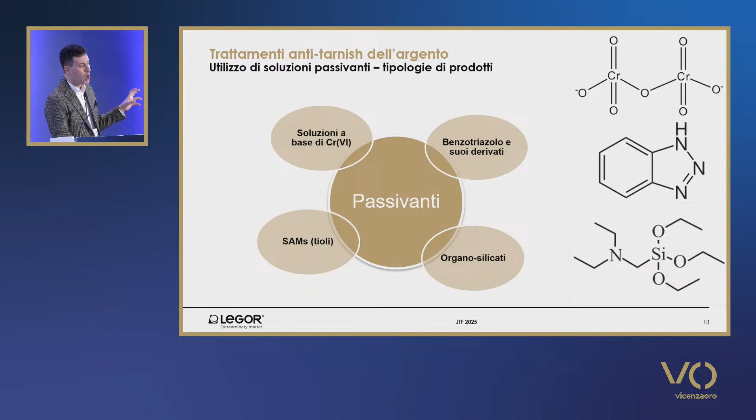Organosilicates are effective, but the problem is that they are difficult to manage because they are dissolved in solutions which are difficult to handle, and they are not as stable as compared to other solutions which are much more used for passivations. And these are thiol-based solutions.

These are compounds based on sulfur atoms, so there is a connection. And these compounds are called self-assembled monolayers. These are molecules which interact with a metal surface and can be adsorbed and can organize independently so as to create a homogeneous layer.

In terms of silver, these are very useful because they can bind to the silver surface and they create a connection, a bond, and they make the surface hydrophobe, thus slowing down the absorption of humidity and the interaction of the surface with sulfur compounds.

Thickness is small, so you have invisible layers which maintain the brightness unchanged. These are very simple to use and low cost, and they are today the ideal solution to preserve silver objects. The great disadvantage is the small thickness, which means that they have little resistance to wear, and so they are not the ideal solution for many situations.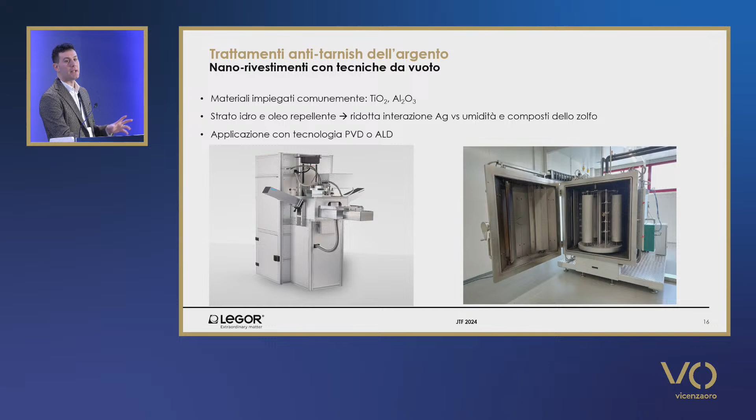The methods of applications are two. They are called PVD, physical vapor deposition, which grows a material on a layer starting from the evaporation and successive condensation in a vacuum system, starting from a target which is eroded and evaporated.

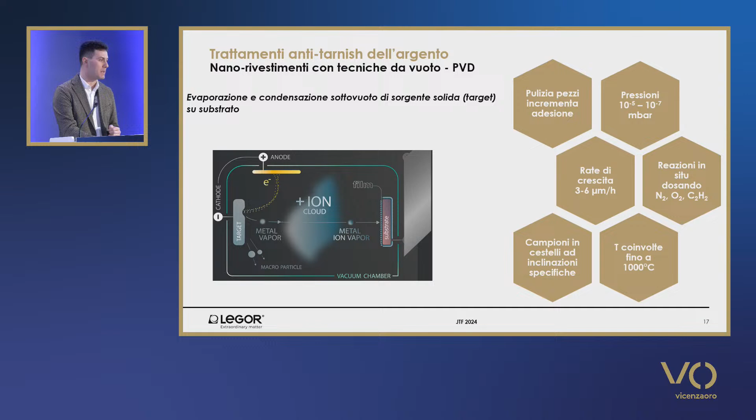We have a growth of a few microns per hour, and the temperatures can be as high as 1,000 degrees centigrade.

And then for anti-tarnish coatings, we can use ALD, which means atomic layer deposition. It is a technique which grows single thin layers by means of impulses made with gases and inert gases, a series of cycles which produce homogeneous compact layers with a very low growth rate.

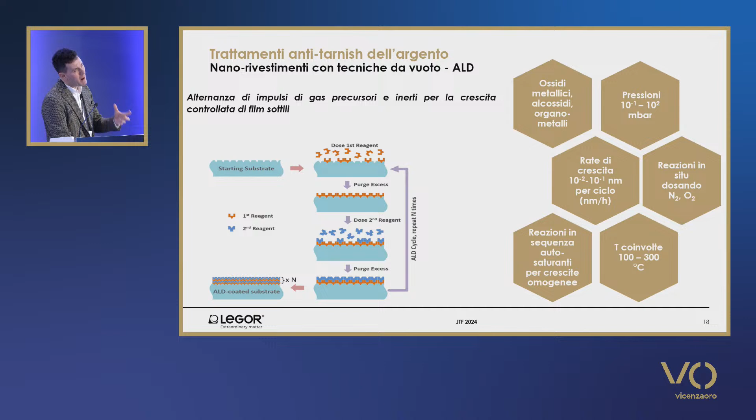And in this way, I can control growth by means of chemical reactions, and I have a high level of control of the growth, and the pressures and temperatures involved are lower than in PVD.

So this technology makes it possible to create high resistance barriers with low thickness, 15 to 40 nanometers, and such a small thickness can be very effective. There are studies which have demonstrated that the same deposit has the same resistance as a similar deposit made by PVD, and deposits above 5 microns made with normal polymer-based resins. This makes it possible to control the thickness and also the compactness of the layer.

In the case of higher thickness, there can be an impact on the aesthetic characteristics of silver, so you have to use thickness lower than this value. These are highly specialized techniques based on vacuum technologies, and there are high costs in terms of technologies, and the staff must be highly qualified. All these costs may have an impact on the final cost of a silver object.

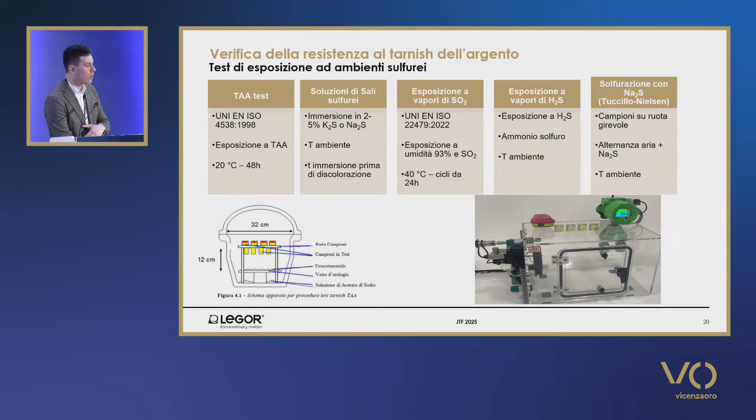Now, in order to assess the resistance to tarnish of all these systems, tests have been developed. The most frequent tests are those where the silver surface is exposed to sulfur. It can be vapor, or immersion in solutions, sodium sulfide or potassium sulfide.

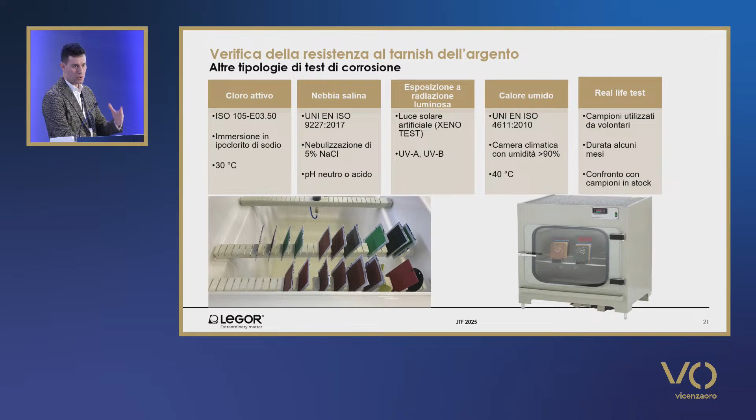Now, it would be appropriate also to check the resistance of these objects by exposing them to other compounds, whether chloride, humidity, or ultraviolet radiation. It would be interesting to carry out a real-life test covering all the possible complex situations.

Now, all these tests are not specific for silver; they are used in other sectors. So today it is very difficult to define objective criteria to assess the efficacy of these anti-tarnish treatments. The assessment is normally based on tests which include exposure to sulfur.

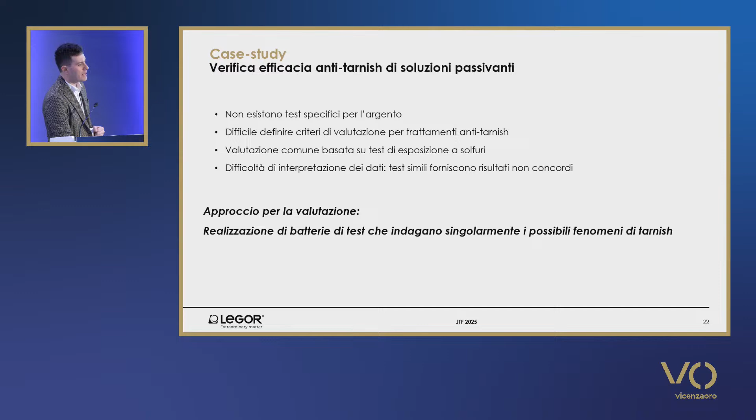There are some difficulties in interpreting this data because the same treatment often has results which are very different from other tests. So today the approach used is to have a series of different tests, hoping there is a certain correlation between similar tests so as to identify the efficacy of the anti-tarnish operation. Now I'd like to show you the results of a study we carried out at Legor

with the objective of comparing 8 passivating solutions taken from the market, all based on SAM systems. Different sterling silver layers were tested, and we did TAA tests and immersions in 5% sodium sulfide solutions for 20 minutes.

Results were assessed in a visual way, but a more objective evaluation was made with the use of a spectrophotometer. These are the results after 48 hours. What emerges is that there is certainly an anti-tarnish effect in the passivating solutions tested, because we see the difference in color between the non-treated product and all the other products.

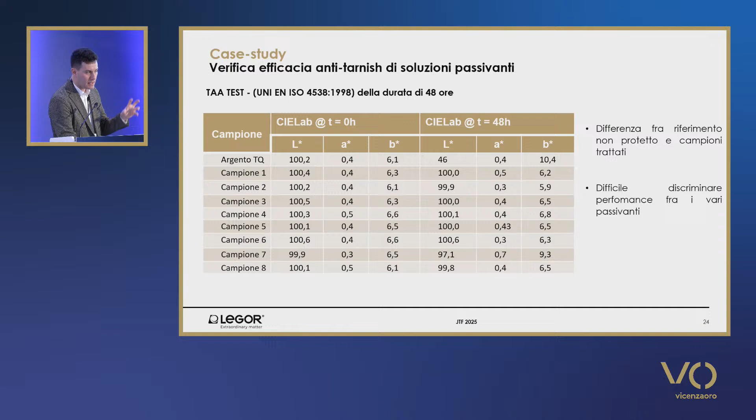But it is impossible to differentiate the efficacy of the various treatments, because all the compounds had good results, and it's difficult to say what is the best sample.

Then this test was made, and in this case, after the first 5 minutes, we could see differences between the various products. At the end of the test, lasting 20 minutes, results were confirmed. There were no significant changes.

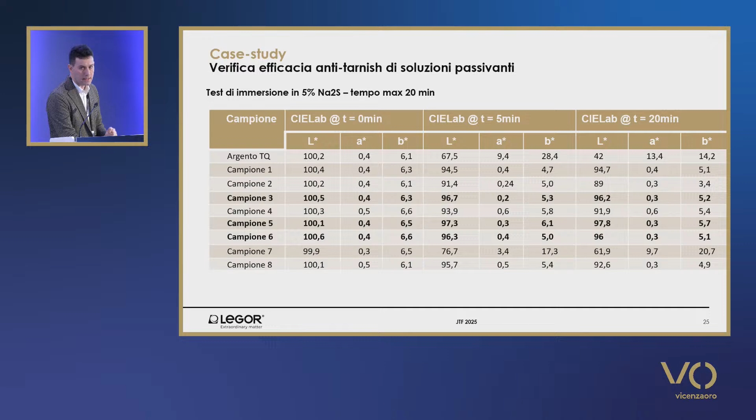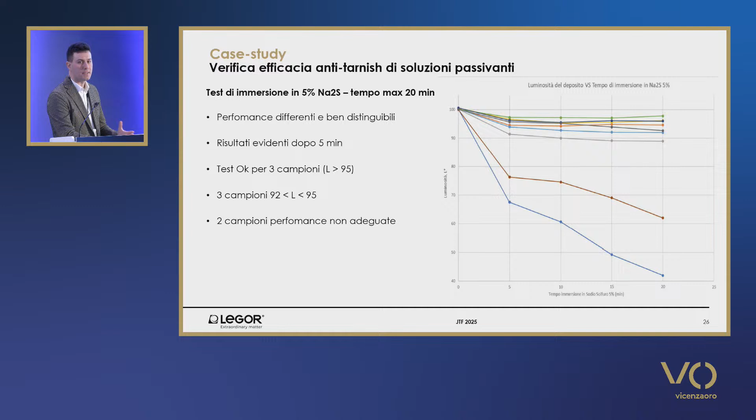If you look at the L value, which is the brightness and white color of the silver alloy, you can see that there is a difference between the various treatments, and after the first 5 minutes results are evident. 3 samples overcame the test with a brightness greater than 95, and all the other samples did not achieve the same results.

Now, in conclusion, what are the next challenges? First of all, we will have to establish a series of tests specific for silver tarnishing. We will have to have the most accurate possible simulation of real exposure conditions, and then we should have a correlation between the test results and the life of the object.

Customers very often ask us how long will the result remain. For us it is impossible to give an answer, because the tests that are made do not give this type of result—they are comparative tests, but I cannot say how long an object would last. Having tests which can give this type of answer would be very interesting, because it would promote the development of new anti-tarnish treatments: invisible treatments with high resistance to tarnish, and also lasting over time.